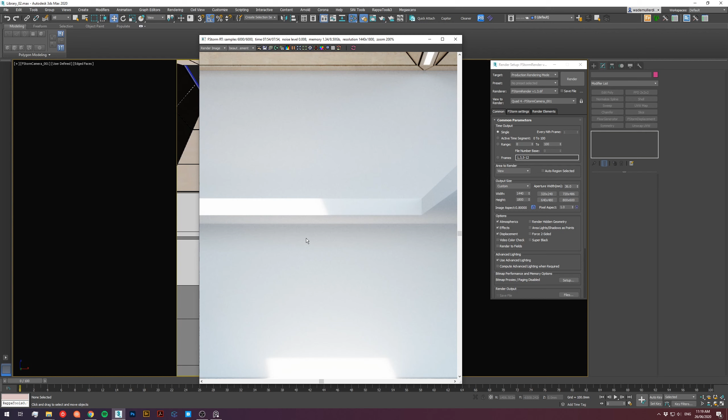Just to see proportionally if the image looks good. I think this is a good start with the ceiling, these panels that look good, enough detail there, looks interesting. I slightly adjusted the lighting to get this nice cast here. We'll see how we go - maybe I'll adjust it again.

Okay, let's get going. I'm just going to leave that open, and I'm going to grab the floor and pull this to the side.

Just going to pull the floor out separate. May just put some thickness on the wall, just in case - not that there will be any light leaks, but just in case.

I just was going to change my display properties here so we can actually see what we're doing. Oh, it's backwards - that's why.

I'm just cleaning up the floor here so we have nice clean lines.

Okay, so go to our scene tab here. We've got a few things - I'm just going to use a pre-made concrete floor, which is Texture Supplies concrete floor.

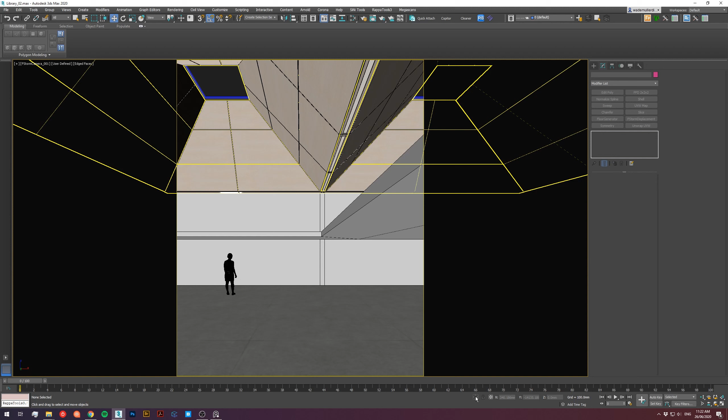Okay, let's have a look. Could even make it a bit smaller - 2900.

Okay, now this back wall, we're doing that - let's pull up the website.

I'm going to do a scan of that concrete. Where are we? I forget which one it was.

I think it's this one. That's really great - I mean, it's a great render, so I'll have to see what it actually looks like.

And I'm just going to get this 8K one. Just give me a second here.

Save it to the library so we can use it again.

Sorry about that - that's a client messaging me. That can only mean good things.

I'll take the albedo, the height, the normal, and the roughness - these large ones.

What I like about textures.com is when you buy a map at a certain size, instead of paying 150 for the next map up, you just got to pay the extra 70 credits, which is fantastic. You know what I mean? That really helps cut the cost.

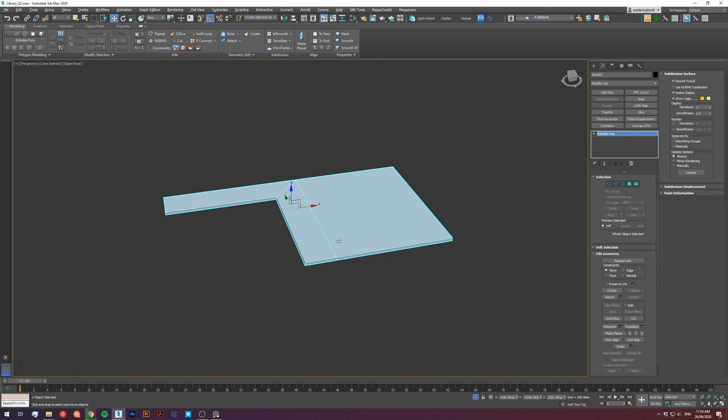I also wanted to double check - this is just really sloppy modeling, but we'll fix that up because that was just temporary. I'm just going to create a shape from here.

What I'm doing now is I'm just going to build a temporary balustrade just to double check that it looks right. Take that, we're going to move it up.

About 900 roughly - I'll do it properly later. I just want to see what it looks like.

See, that's quite high - I'd imagined we would see some things up here, especially if we've got cross balustrades across here. We may have to lift this upper story up and adjust the composition, but we won't do that for now. We'll just build and then we'll see how we go.

While those textures are still downloading, I'll just get them going. So that's the concrete floor.

I'll just quickly show you what it is - it's all the textures pumped in at 100%.

You just mess with it to get the bump map correct, which is a normal map, so you need to push it really high to get actually anything out of it in Fstorm.

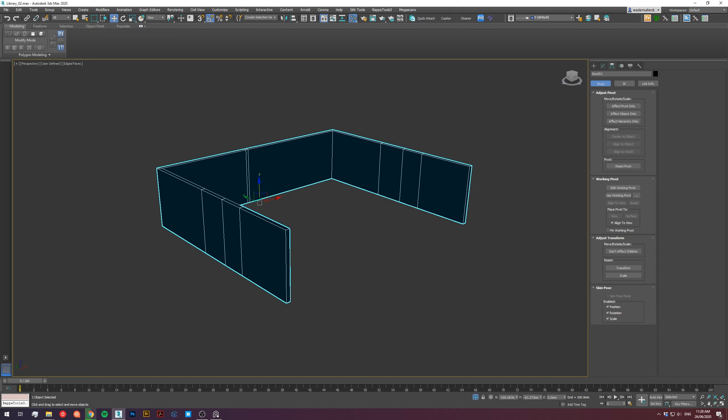Okay, now we can work on the sizing. I'm just going to look at the map so we can have a look at it. Maybe a meter and a half square. We'll have to see how it looks in the actual image. Because it's a box, we can just use a box map.

There's a bit of repeating, but I don't think you'll see it with the structure around it. Let's see if we point the camera slightly up. Just gonna double check the camera height, make sure we're at a reasonable level. Yeah.

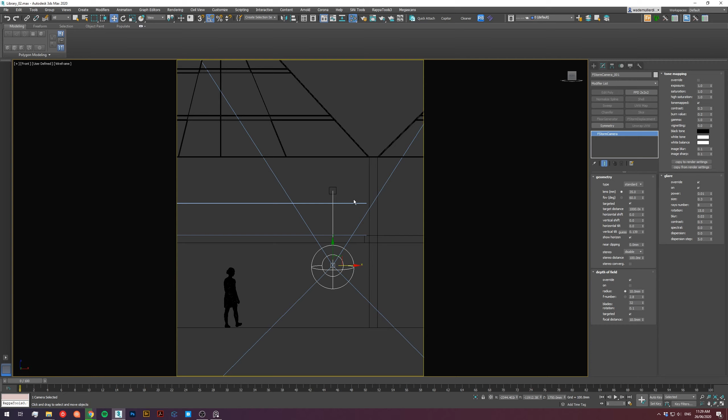See, there is a fair amount of space up there. It's just the angle from being so low. I mean, we can always lift the camera, but it always depends on - if you're using 3D people, you can lift the camera wherever you want. But if you're going to Photoshop any people in, you're going to have a lot of trouble Photoshopping people with an elevated camera. You've got to have elevated people, and they've got to be the right angle. It just starts to get really messy.

And if this was a commercial job, I wouldn't lift the camera. It's just not worth it. At the amount of time it takes to re-Photoshop all the people to look right, it's just not worth it. But we may elevate it. I'll just have to see.

I'm not really liking the composition there where we cut out the top here. I'd imagined a low shelf here along here with some artworks above it in my head, so I'm not sure whether it's working out. I have to adjust the entire composition, but let's just keep building.

I'm just going to give that a render. We'll see how that looks. I'll just pause while that picks up.

Okay, as you can see, when we changed everything from the flat grey to actual textures, it's definitely much darker, so I'm just going to adjust my tone mapping here. I'm working in the render setup as it's just one camera. It's not bad. Let's see how we go. This is not looking exactly as I wish. It's quite dark. I'll have to add some more lighting as we go.

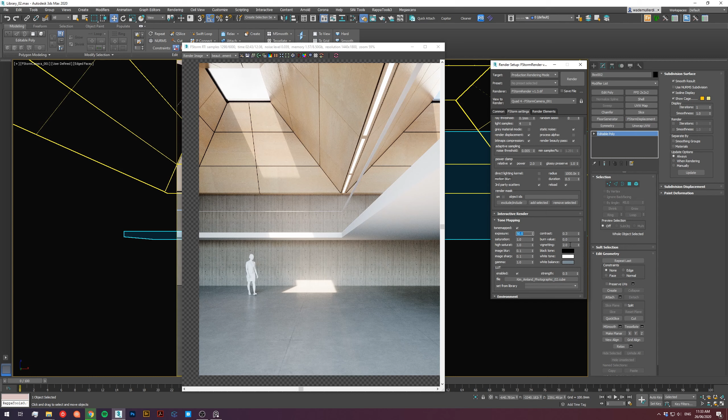I'm just messing with the values now just to see what looks right. I may go up a bit much and then pull back the contrast. See where I get to. This is not working, I think. It's too busy. It's way too busy.

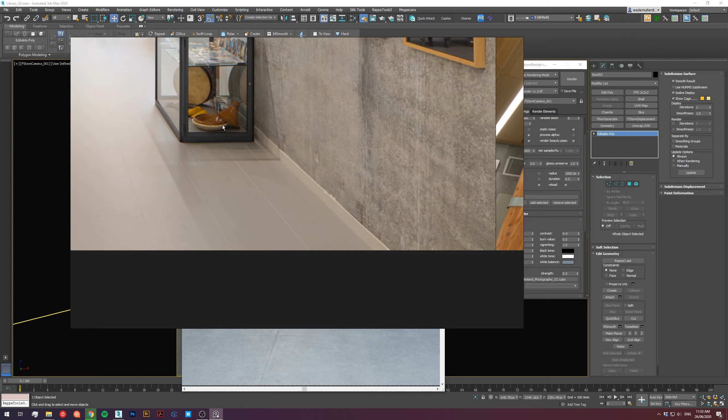Floor wise, it's okay. I mean, in the reference, these really flat grey floors really do a lot to add to the look - maybe we should make a flat rubber floor like this. Oh, that's tiles, but this sort of flat cast epoxy or rubber flooring. We could have the concrete, we could change it back to that raw concrete and put that on the wall, see how that looks. I can do that now without much effort.

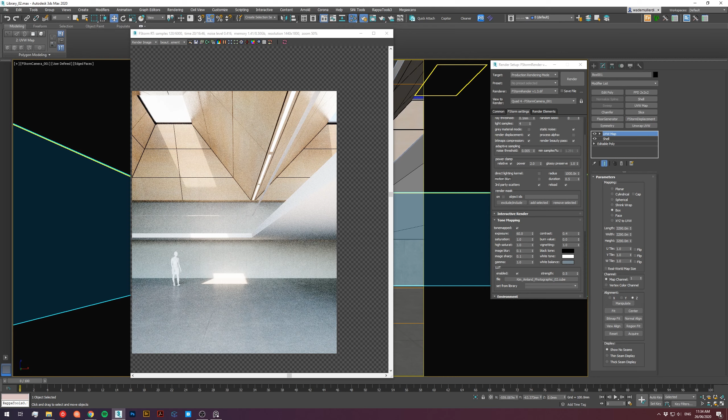Let's bring up my... big fingers there. Okay, so for the floor, I think I'll just have to make something quickly, and then we'll add on an extra layer of noise to it.

Now let's pick a grey. I'm gonna actually - you can actually see that side. Okay, I'm going to add a little bit of warmth to it. It goes a long way. Just a touch. Okay.

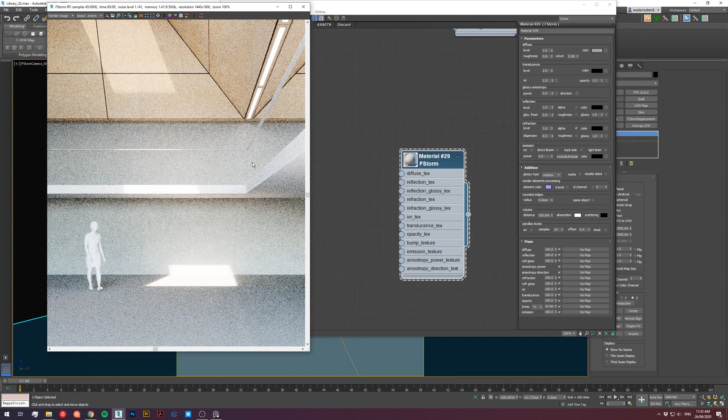Just going to refresh that to pick up the new UVW map settings on that wall. Now let's add some reflections to the floor. Super glossy.

Gonna load us a... it's a good base, let me think. I'm just looking through my library for a good dirt map that works. I've got one which I use for plasterboard usually, and that may work. Where are we?

Just put that directly into the reflection glossiness. See how that looks. And there's a little bit there. I like how it looks in here. What we can do is add a color correction in here to really push it so we can actually see it. Up the contrast. There, we'll lower it. There you can see there's a little bit of a...

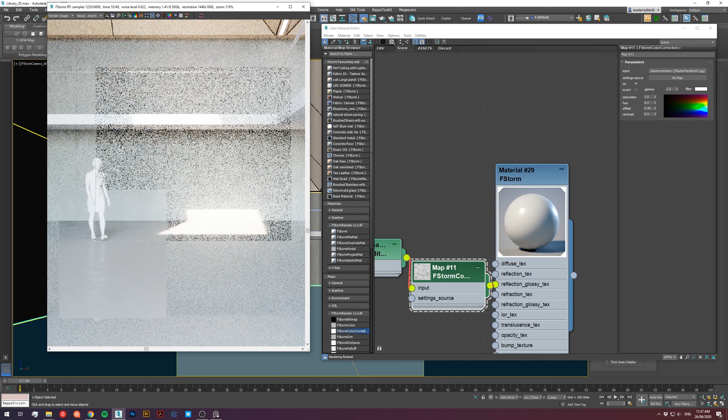Now this back wall - better name that so we don't get lost. Main wall. This is the concrete. It's definitely too bright for me. And I also think the panels are just way too big. Just way too big. We may have to look back through these textures.

See if there's something better. I think that was too busy, there were too many holes. We need these large pieces but more dirty.

I hope this helps, just me working through it in my own brain and saying it out loud. I hope it means something. I think that's sometimes the thing missing from educational content. I've heard Blender Guru talk about doing his tutorials three or four times before he actually records and puts them out. You sort of lose that, you think he just came up with it straight up, but it takes a lot of time to figure out what looks good.

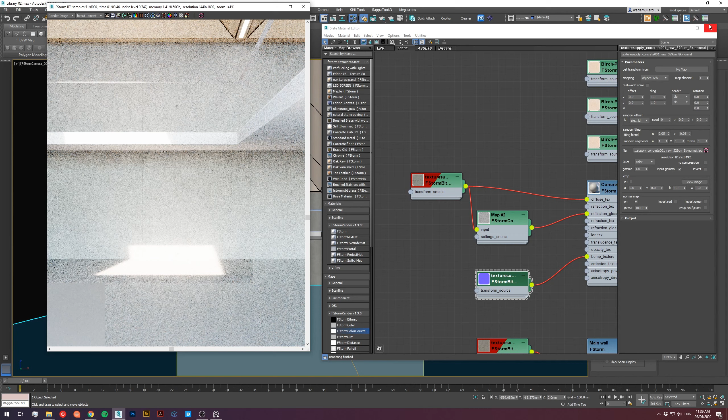I think the number one thing we want to do here is make this much smaller so we can see the panel lines. I'm just going to do a 2D pan and zoom. Yeah, that's good, and we can adjust it so the panel line is exactly on this floor edge, or maybe from the ground up.

I don't know how much we can actually see, but the bookcase is in the way. Okay.

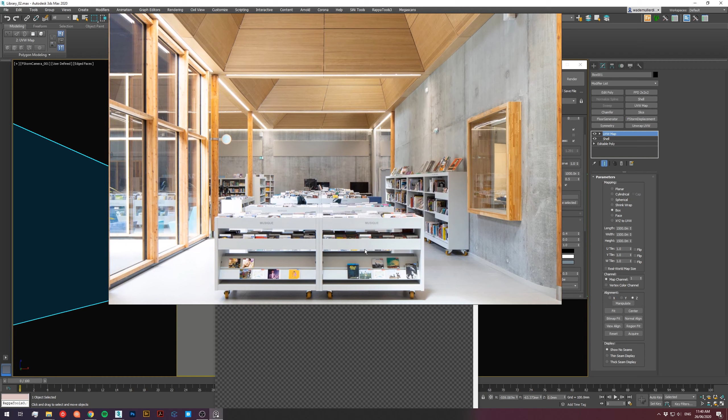Do another render test, because this look is great. There's not even a lot of direct sun, but we'll see what we can get here. I do want to do these embellishments like the little fire alarms and things like that. I think my bookshelves will be a bit more traditional. Let's have a look here.

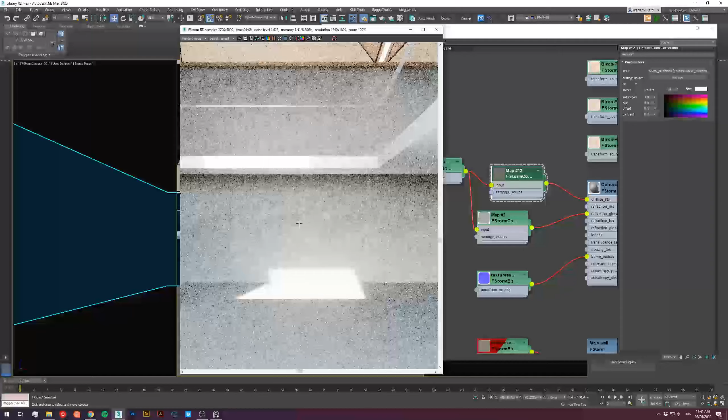What I'm doing here is lowering and increasing the contrast so we can see it a bit more, and lowering how bright it is so we can actually see the texture. Fstorm has this thing where if it finishes the full render samples, it won't re-render on refresh even if you've made a change, you have to close the window and reload it again. I find it really frustrating.

I don't know about anyone else, but I can't exit a render when it's loading. I've heard other people can do it, but I seem to be on the edge of crashing anytime I try.

There we go, we're getting that nice contrast at the top here, bit of shadowing, I think that's good. There's a lot of repeating, it's a bit of a problem, but hopefully we won't see it behind the shelving and all that. Always put a figure in there to get a good sense of scale.

Yes, I think this floor is good. I had an idea that there may be some display cases with artifacts in them, and they would have this same warm grey palette. I've got some African masks I was thinking of putting in a display cabinet right in the front, let me just load up my library.

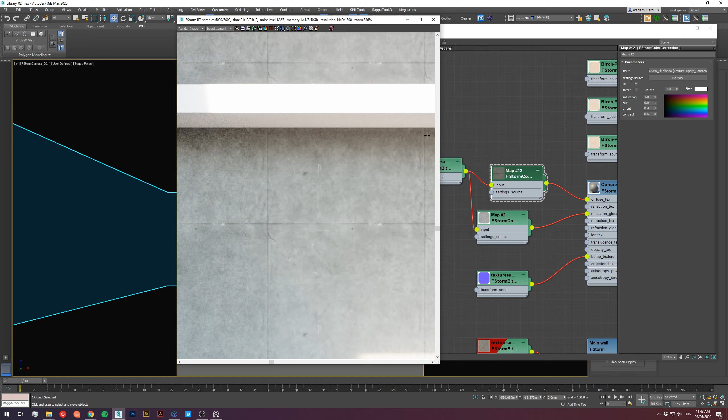There's a lot of repeating here, it looks like each panel is repeating, but I thought this was only a 4-to-1 repeat, so it's a bit of a problem. You can always adjust the texture, but sorry, my library's still loading. I'm just letting this render a bit while we load that.

Okay, got some, and where I put them.

Yep, okay, so next let's build this platform at the top. Now the plan for that is, let me just go to clay mode here, which is the modeling mode, I guess.

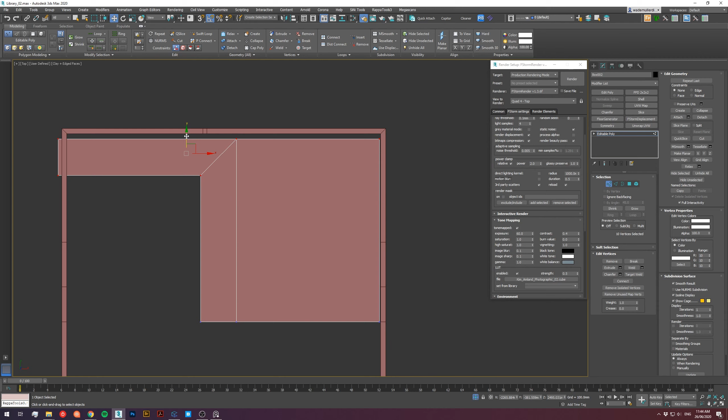There's a gap there, we could push this backwards. I'm just going to set up the scaling and positioning before we go anywhere, so we can model correctly. I want this line to be exactly here.

Okay, so modeling wise for this, I'm going to put like an I-beam along the edge here, so you can see the profile, and then underneath I'm going to have some beams running either this way or this way, depends what you see from this angle. I'll just have to have a look.

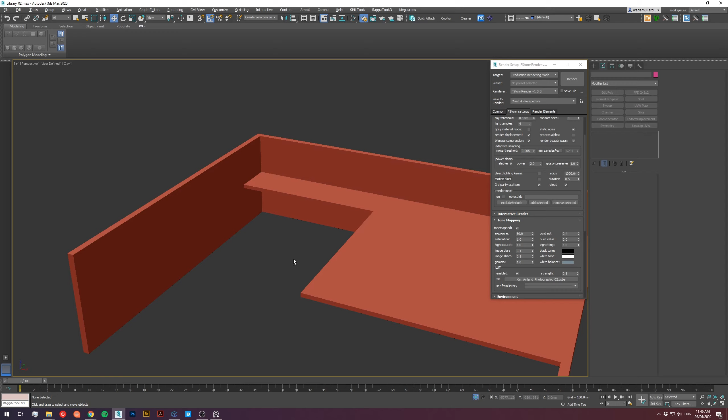I'm going to model bracing and stuff underneath, and then we'll have a mesh tile which I'm going to make with geopattern, so it'll be really high detail, but you'll be able to see through into the structure, and that's where all the lighting will be. So it'll look like a flush metal roof, but you'll be able to see the structure behind it, which is slightly lit so you don't lose it. Underneath we'll have the shelving running this way. This would be just a corner of the library, but you'll never see any more. And then obviously I'm going to put this balustrade up the top.

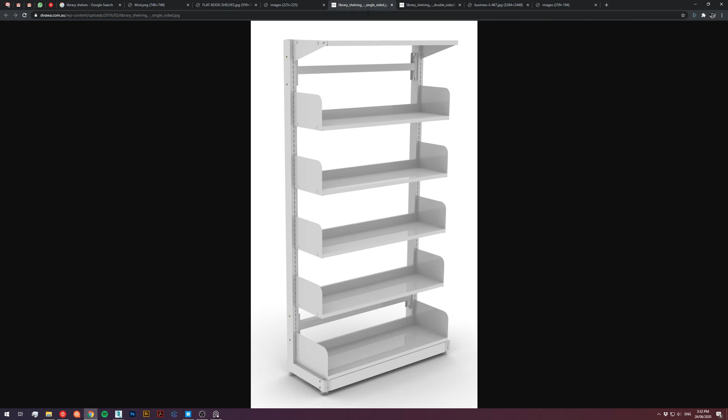For the library shelves, we're going to go for something very standard looking, not like custom built architecturally designed. I sort of like it, it's sort of very reference-business-like, something like this, so you can see through the stacks over the top of the books. I think that looks great. Probably not this beige, more white, and we may lift them up, very similar to this with the feet, and we'll have some signage and stuff like that.

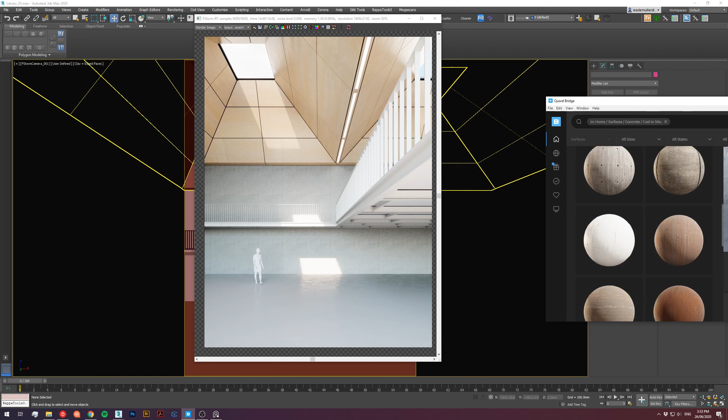So from now on, I had a browse quickly, and I was looking for some concrete in Megascans, and I found one that I think will work great for us. This is it here. It looks good, I think it's got that same sort of look as in the reference. Hopefully I've downloaded it now, and I'll just make sure we're good to go.

Got Megascan's Bridge going. Once you have Bridge open, you just hit export, and if Bridge is working properly it'll pop it right here. Or not. Is that it there? Who knows where it pops it. Here it is, it's always got some sort of strange name.

I always find that the roughness level is really odd on Megascans, and everything else just needs to be reconfigured a lot of the time. Wow, that's really blue, we'll have to control that. Just put a color correct in the middle here, gonna pull the saturation down, I know it's already too blue. And that bump, let's have a look at it, and put that on 100.

To be honest, I'm still trying to fuss with the way Megascans come in, it's definitely not perfect. I don't like the way Fstorm handles normal maps, there's still a bit of confusion about how to get the bump proper. So this is a 2 meter by 2 meter material, just applying it now. I'll take this full shading, let's have a look.

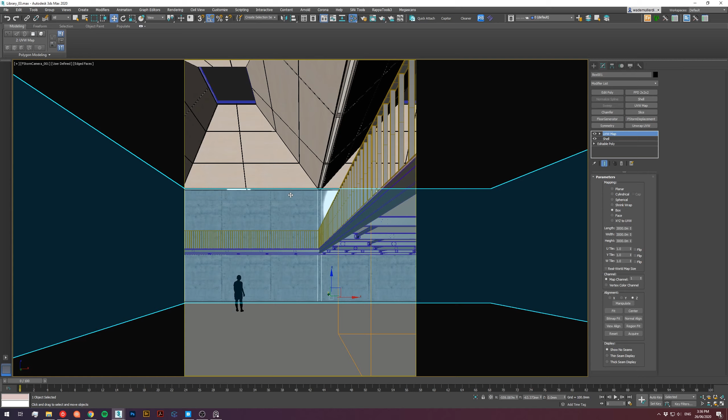Okay, I just want to see the tiling. Yowza. Problem with these big spaces, the tiling becomes a real issue when you're going to see such a large amount of it. It's not too bad, definitely needs some adjustment. See how that goes. Thought that was stretching, now I'm just gonna pop in close. That looks dramatically too big.

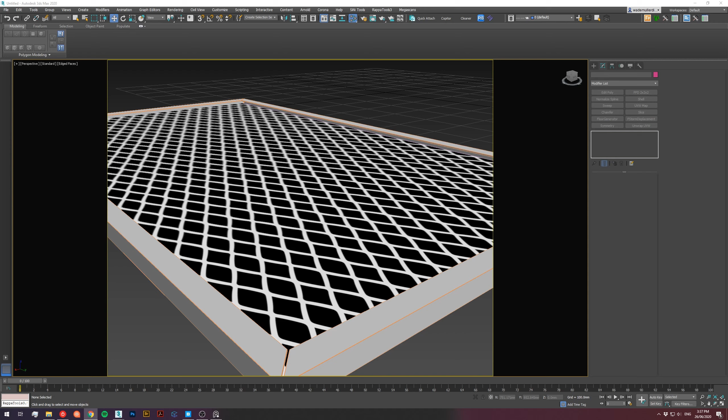The texture is from, I think it was from textures.com. It's not a scan, it's a PBR. It's this metal mesh, it's actually brand new. I'm not 100% sure whether it's going to be the right look. If you scale it down, that's the idea. It looks like a fine mesh, but I'll have to see.

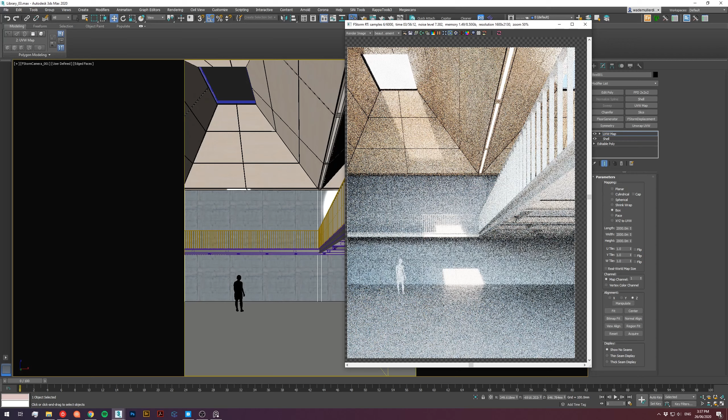Let's have a look here. Yeah, that looks a bit odd. Well, we'll leave it for now. Let's have a look here in the whole space. Still very blue. I mean, it is blue. Maybe it's just the light.

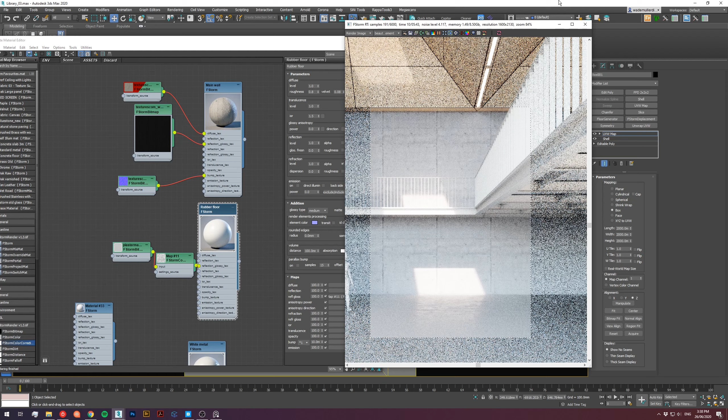That's definitely much better. I may have to lighten that floor up. That's better. Okay, leave that be. I'll just show you this mesh and how that renders.

So I just made a little frame, and this will be just a repeated tile. It's got displacement on it, and it may be okay for us for this, you know what I mean? It's one element. I just don't know really whether that's the look we want. I may just want a crosshatch, like just a grill with flat polygons. That may be better.

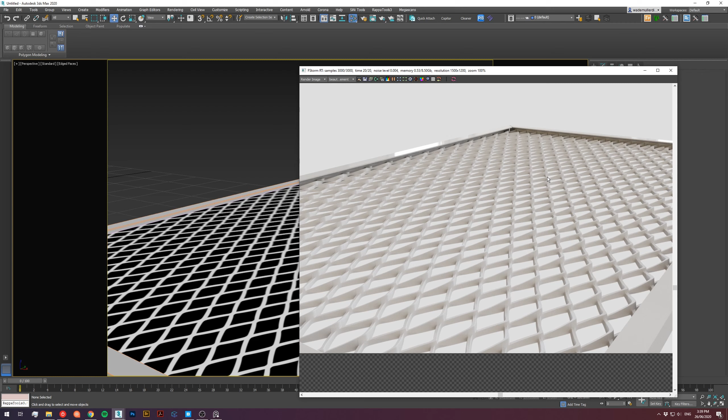I think the best thing to do is to take this floor. We'll just... I'm just going to take this top level, what would be the top floor, just going to pull it till I've got it where I want. Sit right in there. Okay, that's exactly what we want.

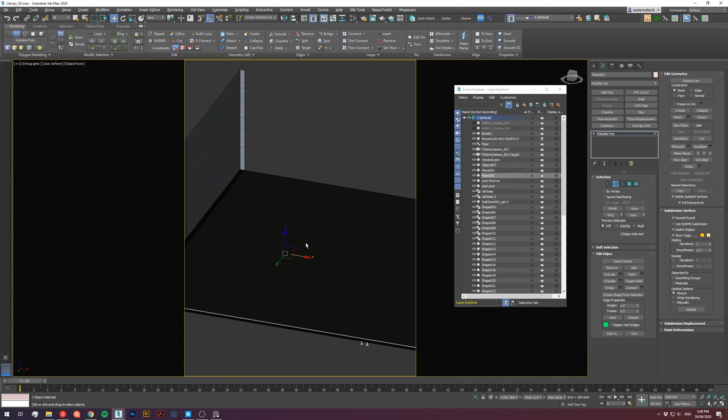Let's take the shell off it. I'm going to do is just going to hide... now I'm just preparing the geometry to make the tiles.

I'm just going to cut them however I want. I'm not going to be exact. It's probably a bit far this side. Now how do I want them to run? Let's think. Sort of landscape this way, long ways.

Good. It's good because this bay will just be the same.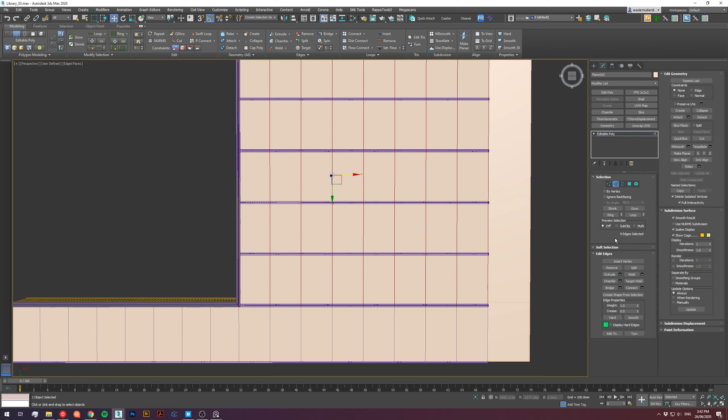You can do this with RailClone. Maybe I should. It's just I can control exactly how the edges work, which is really advantageous.

Hi, Cameron. Hi. Sorry about that, sharing an office during COVID.

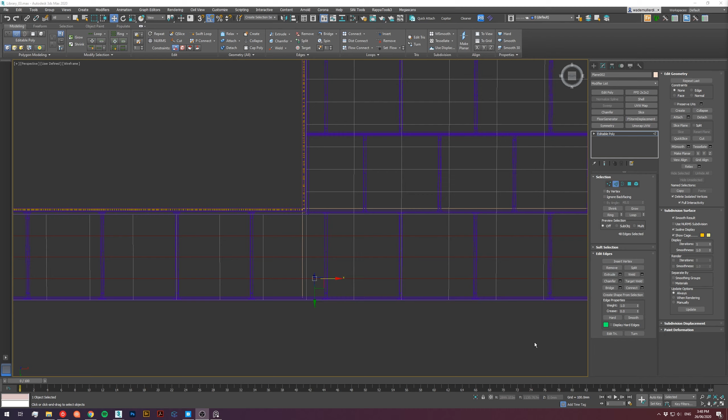So let's just run with what we got. So I split the mesh here. I'm just going to flip it so it's facing down. That'll make it easier for us to work with. Was that down already?

Okay, now these would be the individual tiles. So what I'm going to do is I'm going to grab them all and inset them just by polygon. That's too much. We just want to inset them just enough so that, maybe even 2 mils, so that they read as separate. I'm going to do 4 mils. 3 mils.

Okay, and what I mean by that is I'm going to invert it now, delete that. Now we've got individual tiles. Just going to do this as a polygon process. So we're going to go inset again.

About that much. Now I want to detach this plane, and that plane is going to either become the texture we use for the mesh, or it's going to become how we generate the mesh if we model it.

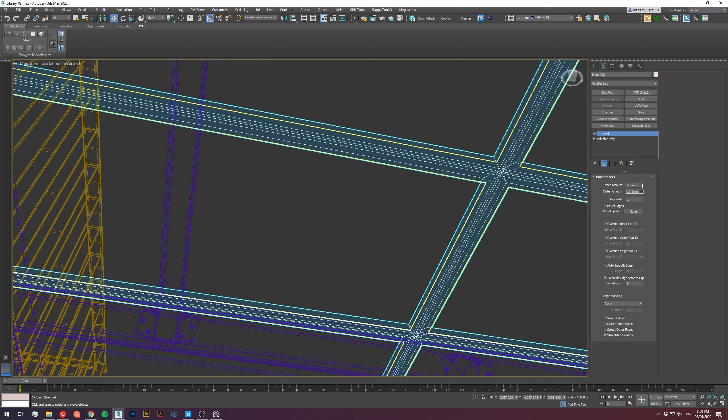So now I'm just going to shell this up quite a lot. 20 mils.

What I may actually do is, just trying to think, do I want to see the inside of the mesh like I built it last time? So we just grab it, and I'm just going to extrude it, pull extrude up, and we'll get like a loop there. We'll just hit symmetry on the Z axis, flip it.

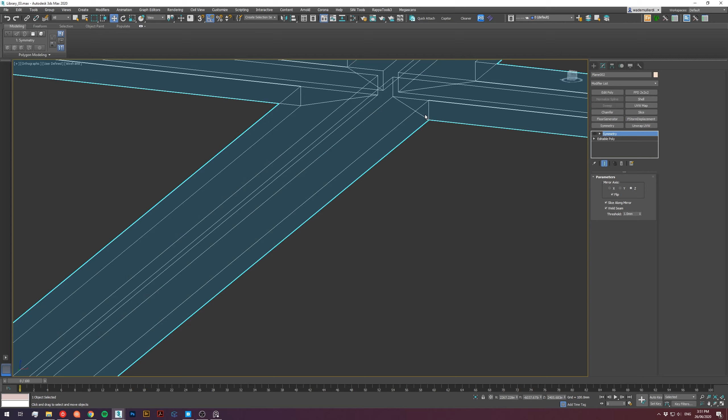Okay. If we grab that, just push it up. You can see there it's got an inside gap. I'm going to shell that just about 2 mils, or even 1 mil. Let me just double check, I went the wrong way here.

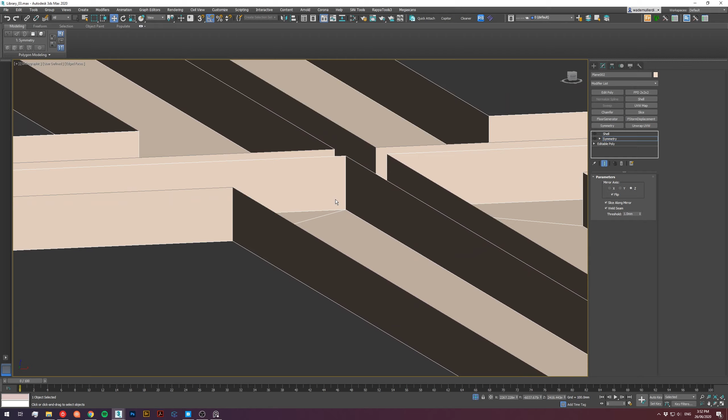How do I want this to look? Let me just think. Does it really matter? Will we see it? I don't think we're going to see it. Okay.

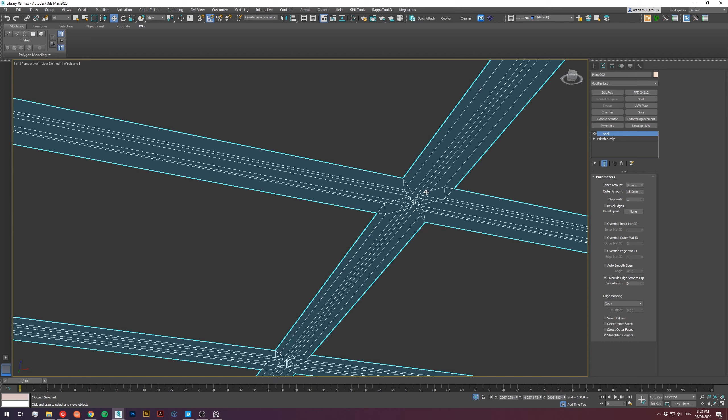Now I'm going to collapse those because what I want to do is, this is like non-realistic geometry. If this was a tile, it's going to be joined in the corner. They're going to make it from multiple extruded aluminum. So this is the level of detail we've got to add. I want to select all of these edges. It's going to be slow, but worth it.

Okay, now I've got all of those edges, should do at least. I'm going to loop them. I'm going to chamfer them open by just a tiny amount, 1 mil maybe, just enough to see it. Even half a mil. Just going to open those, let's make it 1 mil. You're never going to see it, plus we want room for the chamfer that's about to happen.

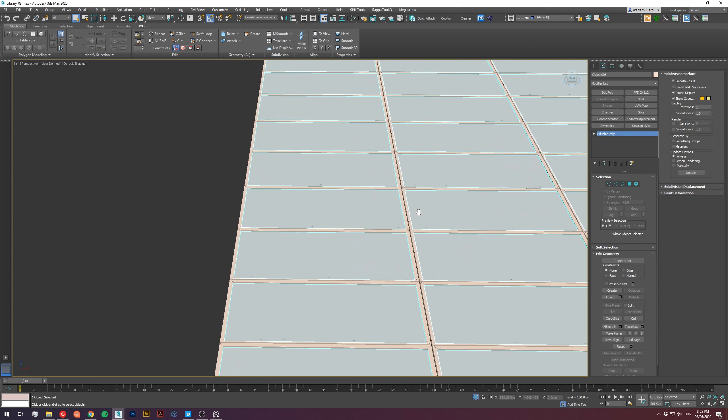I don't know if this plating, grill plating, is the best way to go, but I wouldn't mind checking it out. So the advantage is I can just apply a texture to make it much faster. Just going to paste that geometry in here. Grab these.

So there we go, we'll have to see what it looks like now. Where's that metal material? Just the same simple palette. That's what good architecture looks like.

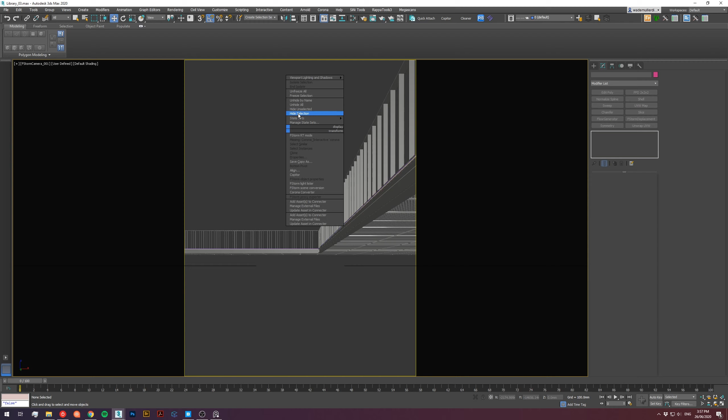I'm just going to group these so we can grab them when we come out of render. Just unhide the ceiling. Let's hit save, you never know when something can crash.

Okay, I'm just going to start a render. I'll just pause and come back when it's rendering. Okay, that's rendering now. I don't think I like it, it's too industrial. I think we need something that's a bit more refined.

I just think like a normal fin grille, if you know what I mean. Just see if we can implement something like that. Just trying to think of the best way to do it.

Basically, what I want to do is this. Let's just apply a flat material to it.

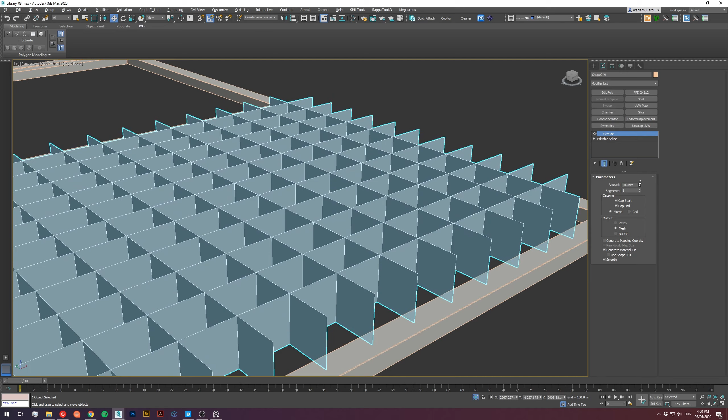This is what I'm thinking. If we make it too thick, we won't be able to see the structure underneath, so it's a bit of a challenge to make it fit.

We'll pop it over here. Let's see, can we see that? Excuse my popping around, how else can we see it? I think it's too thick.

Just like that, like a grill. If we start that one, let's have a look how that looks underneath.

I mean, we could have an exposed ceiling with services and that. I just thought the grill would add a bit of a refined look to it, but at this angle I think we're losing everything we built underneath, which is not exactly what I wanted. I wanted to be able to see it a little bit. Could always pick it up in a vignette.

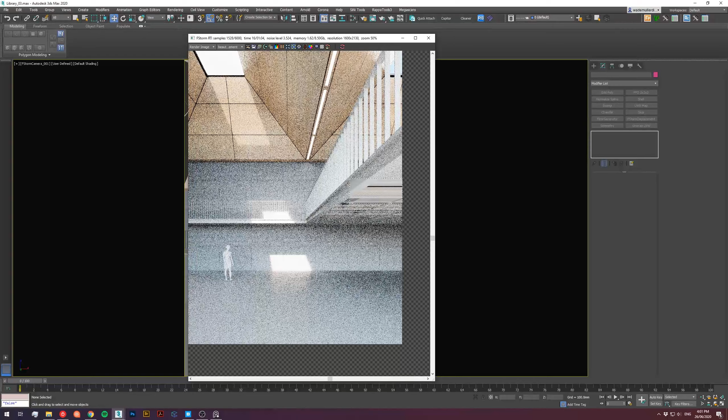I think we better also do something about the lighting. I would like the bottom half right here to be darker, sort of like dark library shelves underground, and this section here to be bright, like you're studying over here and you're going to delve into the depths to get your books over on this side.

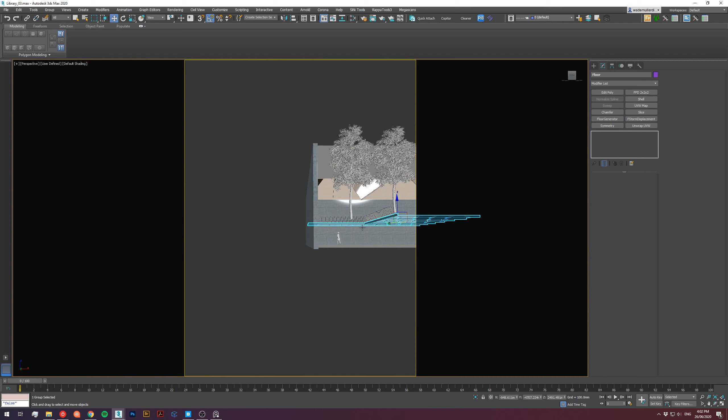That was the idea, this will be much more yellowy lit, and this is much more bright blue sun. That was the idea, a bit of balancing, because right now it's homogeneous in the lighting, which I think is a bit boring. So I think what we're gonna have to do is have a bit of a play. I did some trees outside to see if I could get them to cast a bit of shadow in there, but what I'm going to do is just a little bit of light blocking outside of camera, you won't see this.

The best thing about Fstorm is it doesn't render materials without textures, just flat grey, unlike Corona, which renders whatever the max material assigned is. So if it's a pink block, it renders pink, which is a real pain in my opinion. Then I have to make sure everything's got an actual grey material on it before I click render. Whereas with Fstorm, if you leave something without a texture, it just stays grey and fades into the background.

That's it, that's better. That's what I wanted, this sort of dark side here.

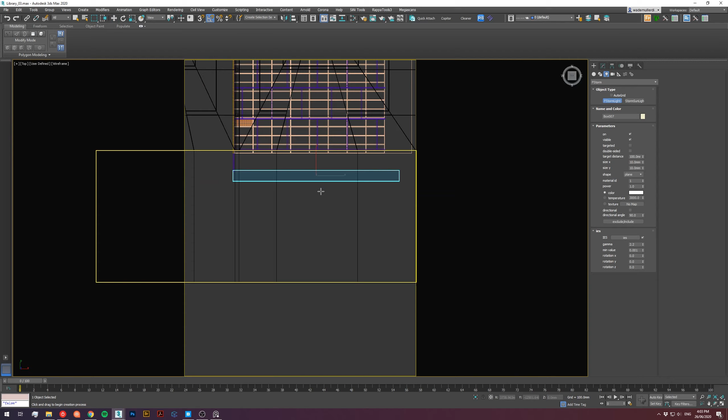I'm just going to put some rectangular lights in here, which would be just like those under shelf lights. Let me put them a little further in.

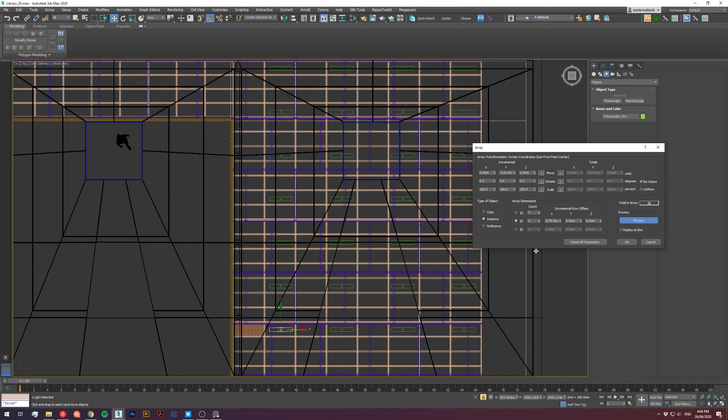Maybe a few like that. Let me go right. Maybe 4 like that. Put one more down this side.

Just because you can't see it in frame doesn't mean it's not important.

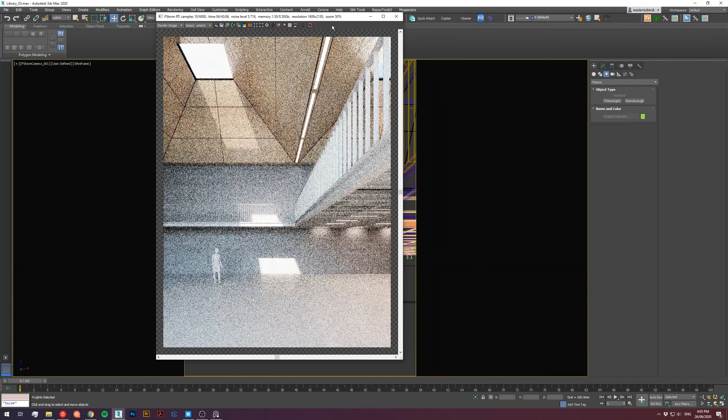Here we go. Okay, so that's good. Let's grab these lights, we're going to start to tint them. Yes, like this, sort of this dark underside lighting there.

Maybe a little bit warm. What if we can just mess with the tones a little bit? Put a little bit of green in there.

I think what I'm trying to simulate here is the tones you sometimes get in film grading in the lights.

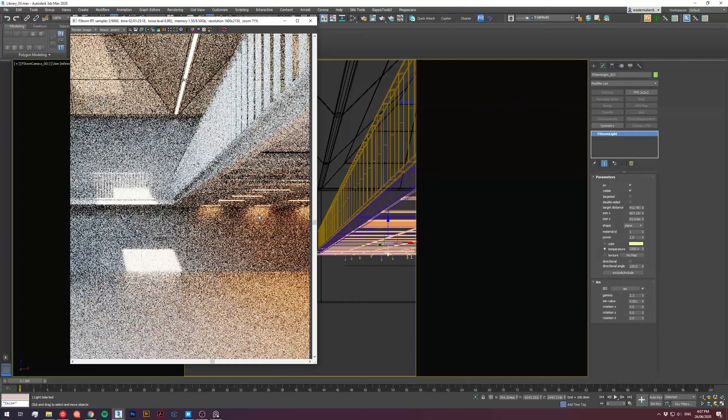That's it, this sort of warm, darker side. There may be too many on that side, but hopefully the bookshelves will obscure it a bit. And these lights would sit behind the mesh, so we should try to do that.

I may just leave the metal like that. We'll have to build light fixtures for this.

Let's see if I can find a nice... What I'm going to do is just go pick a carpet out of another scene I did and roll it on the right here. That may help us get a sense of what's happening here a bit better. Alright, give me 1 second.

Okay, so I've grabbed that carpet, I'm just going to make the geometry so we can use it. Can I do another photorealism trick to make the carpet look better? So we want that exactly on the line here, as close as we can get it. Now, here's the trick.

Just going to create a spline. Detach that side - that's going to be that carpet. Okay.

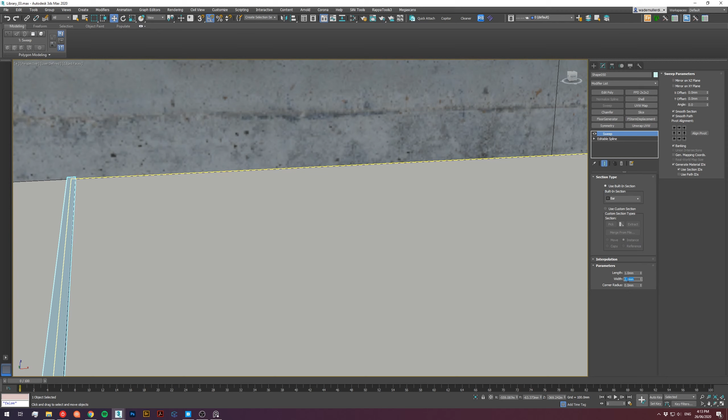Because what they do is make one - they wouldn't have a step up like you'd have in your normal house. What they'd have is a little strip, tiny little strip, like 1 mil high, 2 mils wide, just like a little piece of metallic brushed metal. Let's just put a chrome in there. So that they sit flush, but there's - you can't just have carpet sitting ragged next to another flooring. Here's the floor.

Just going to grab this UVW map, place it on here.

I'll just show you this one. So this is a carpet I made. I can't remember where I pulled the actual carpet from - I think I pulled it from something else. And it's got a fall off on it, which you may not see, and the bump is just adjusted for Photoshop and blurred. And place that on this side.

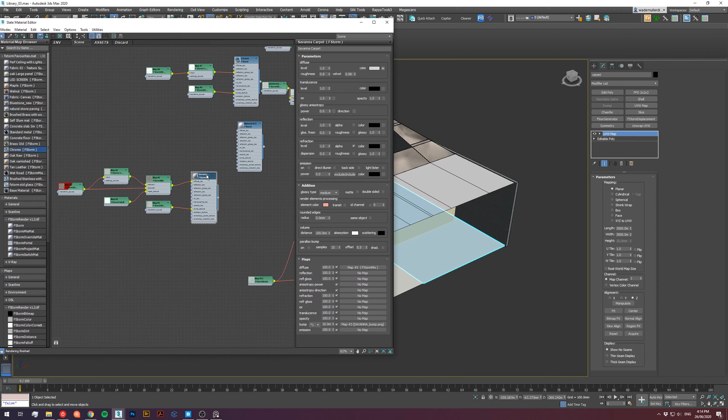Some rotation on that UVW. What is it - 3,000? 3 meters, 3,000 mils. And often, like things with Viz, you have to make it bigger than it is in the real world for it to read properly. Let's have a look now - we're getting a bit more symmetry in the composition.

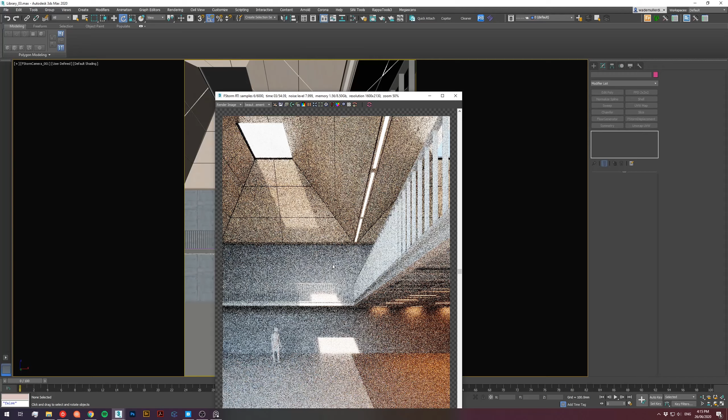Okay, here we go, let's have a look. Yeah, that's not bad. We may actually have to pull it back, even though it's correct on that line, because the composition looks odd. And it also looks dark. So I think we're going to have to push this way higher.

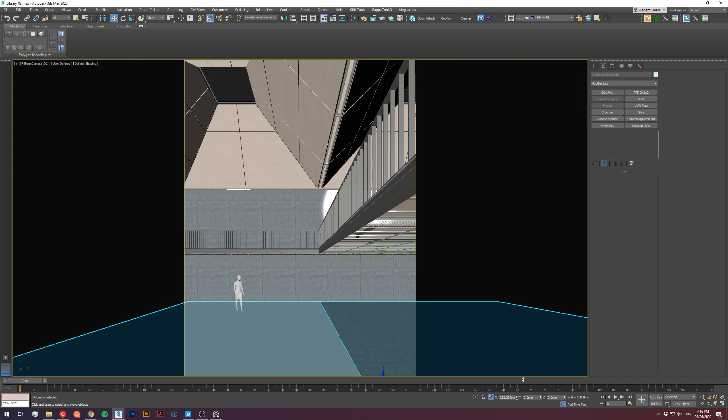Going to cheat here, move it visually right. Let's have a look at that.

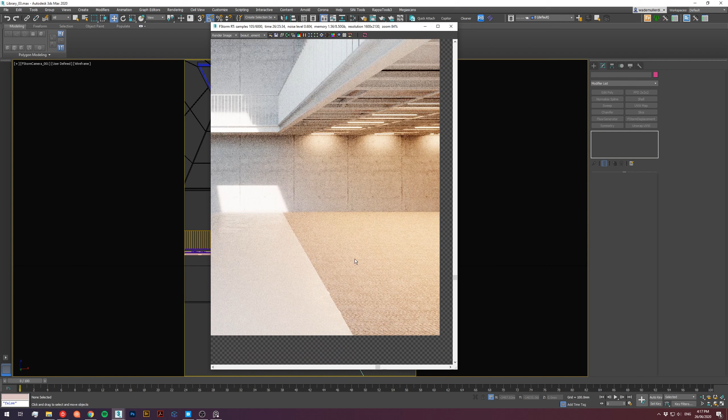That's definitely better. That's good. I think we're going in the right direction. We'll have to work out the lighting on this side and make that less chrome, or something darker - maybe just a strip of black metal. And we may work on the carpet further, but we're getting the components in there. And I'm starting to think we're not going to have mesh here because I don't want to lose this structure we built - it looks good, and I'll be ashamed to cover that up.

The plan changes, I guess, and I think we'll leave it here for this episode. I'll let this render out so you can see it properly. Next episode we'll build the shelving along this wall here, and the shelving up here will be the same, with a low height one here with some artworks above. Then we'll build the racking on the right here - it'll start maybe further back. And then we may be able to get a start on these tables here, which would be the study tables, and maybe a display case or two, depending on the room.

Still trying to work through the composition and what's in my head compared to what it's coming out as. I do like this splash of light here, but I'd like a bit of light on the desks here, so I may have to play around with an Fstorm sun rather than an HDRI, because I'm not getting the kind of direction I want out of the HDRI. Let me give that a shot now and see if I can come out with something better. What I'll do is throw the sun in there.

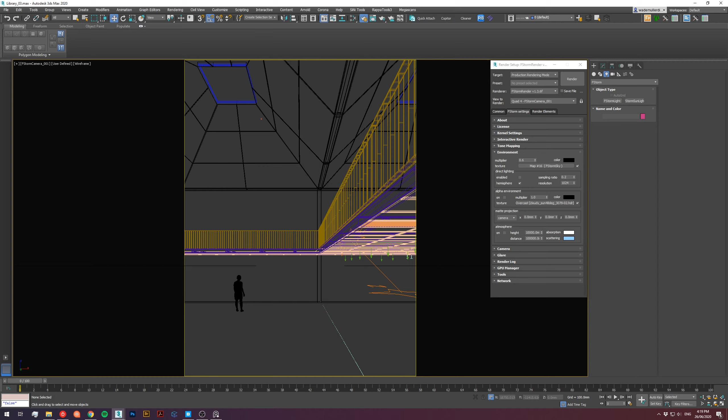Everything's slow today. Okay. Now I'm just going to fuss with the sun, trying to think about which way I want it to come in.

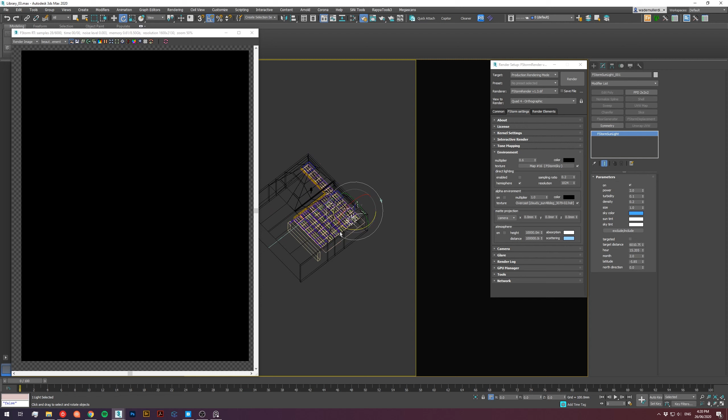I'm just going to make it targeted, and I don't have to mess with this. Just going to reload this. Wow, what a difference. Okay.

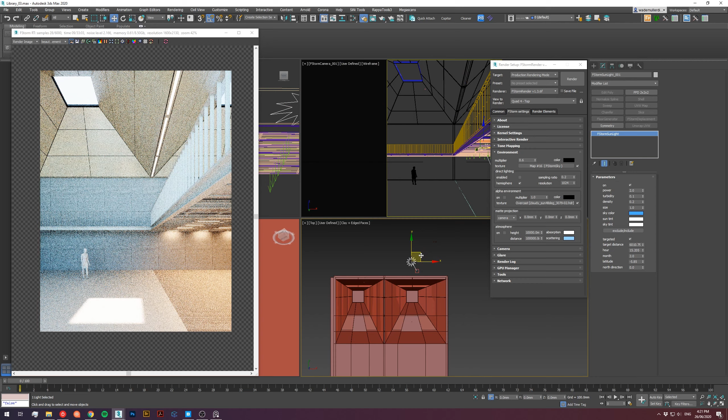There we go. The windows are so small, it's very hard to get it in a place you want it to be, unless we go straight down basically. And then they're so square, they're so just... unless we really increase the size here to open them up. I don't know.

Autosave. It's not bad, bit of a splash there, but I don't know, it's not really working out. I think we revert back to how we had it. That's why you have an environment tab with your options.

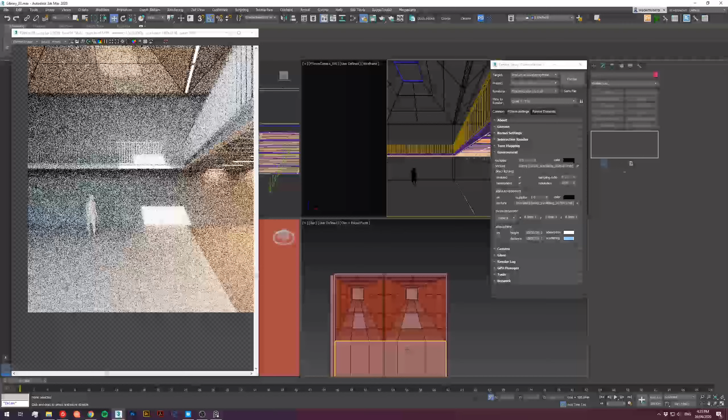What do I think on that one? I think it does need a little bit more work. It's nice you can see the clouds now. Alright, well, we'll keep going. I'll let that render out so you can see what it looks like, and then you'll know where we're taking off from next time. Okay, thanks.